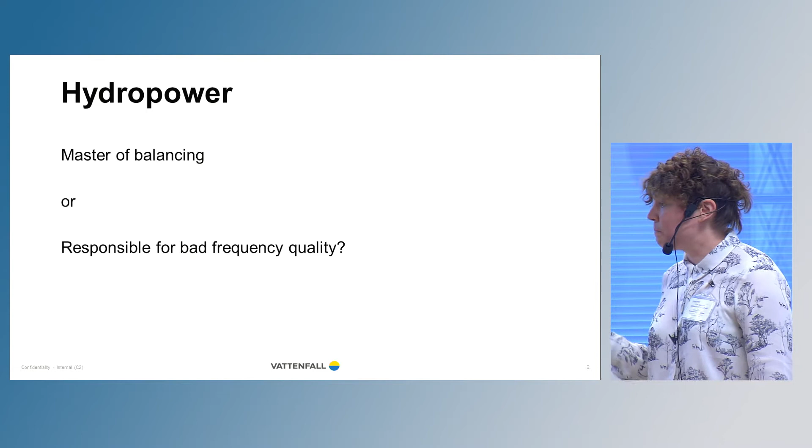Starting with master of balancing. One reason why hydropower is so good is because start and stop is very quick for hydropower, while thermal power takes a long time to heat up. It can take many hours to start. For hydropower, it's usually a matter of minutes. So going from full stop to full load is quick.

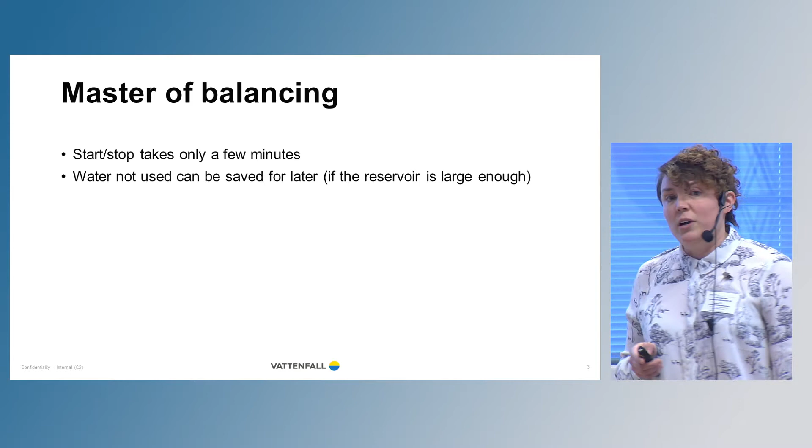Also, when we regulate hydropower, in most cases, we have reservoirs in the river, so we can save the water that we are not using. It's not like wind power, for example - if you regulate down, the wind is just spilled, you can't use it. But for hydropower, if you have a reservoir, you can save it. And in Sweden, most of the hydropower, at least large plants, have reservoirs.

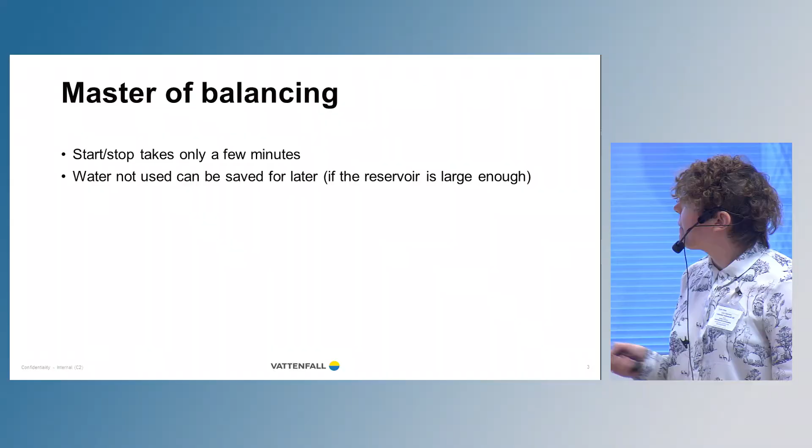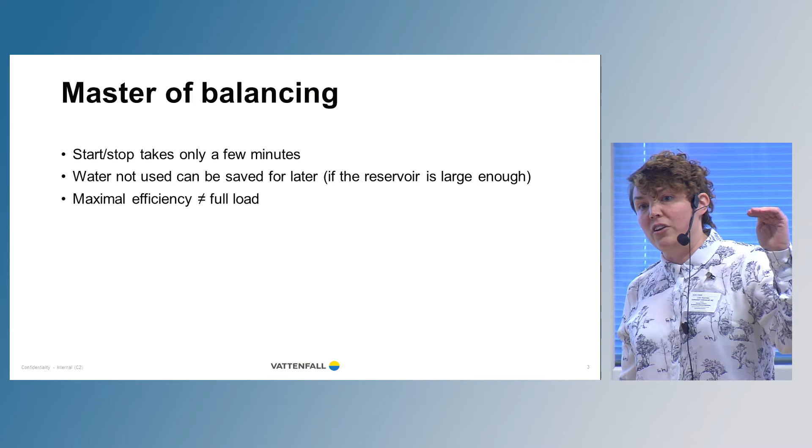Another factor is that normally maximal efficiency is not the same as full load for hydropower. So if you want to run your unit on maximal efficiency, you still have a margin for up regulation and down regulation.

Regulation speed is quite fast too - normally, at least in our stations, we have 1% per second for ramping of power, which is quite fast.

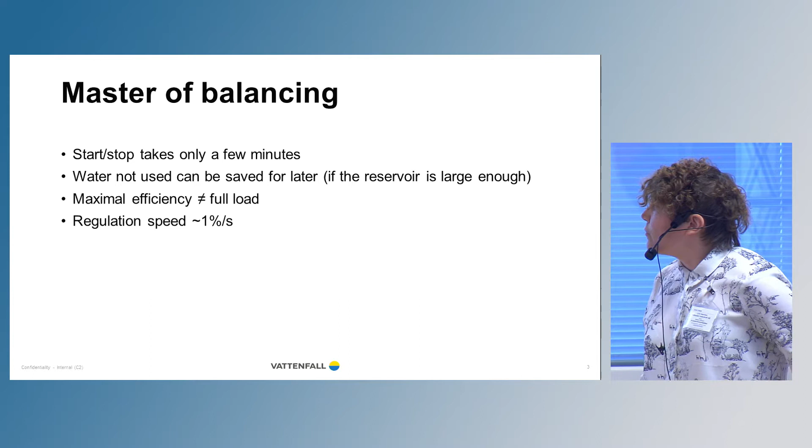So what is the downside? Why is it not good at regulating then? Well...

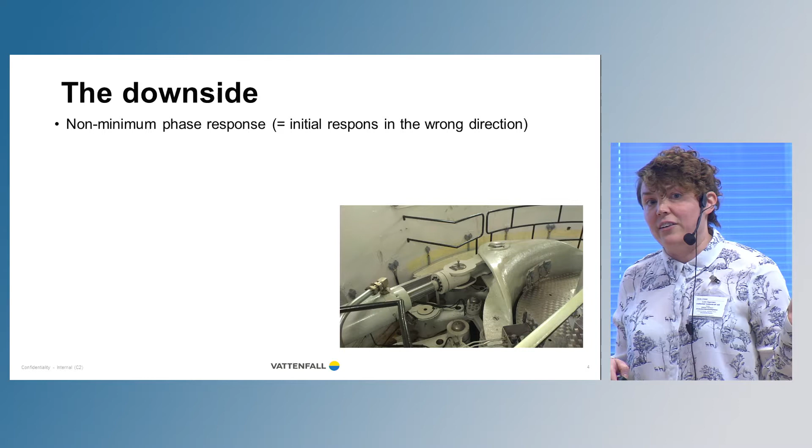Evert and Andreas, I think, have already talked about this effect: non-minimum phase response. What is that? It means that if you try to increase power, you will first get the response in the opposite direction. So if you want to increase, you get a decrease, and then an increase, and the other way around - if you want to decrease, you get first an increase. It's because you have to accelerate the water in the waterways before you can actually get the power out. So the initial power that you try to get out is spent by accelerating or decelerating water.

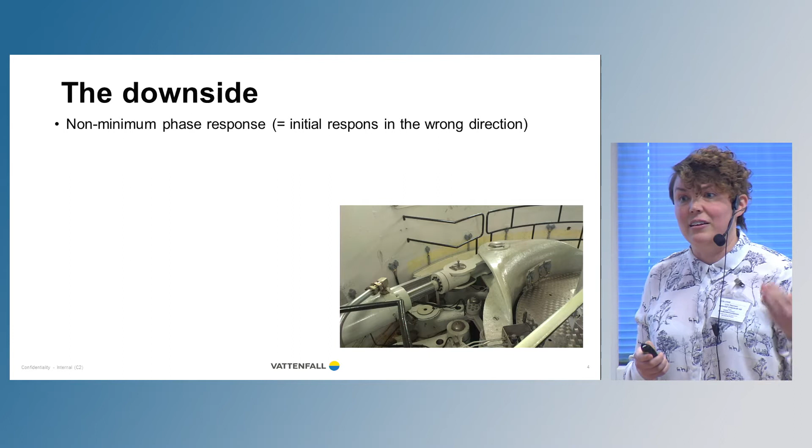So that's one part. Then another part that Evert talked a little bit about - or maybe he didn't talk exactly about it - is that output power from a hydropower unit depends on the head. And the head is something we can't control. It depends on how other units in the river have been run or operated before, and also how you have operated your own unit in the past. So that's the head - the head is the difference in water level above and below the hydropower unit.

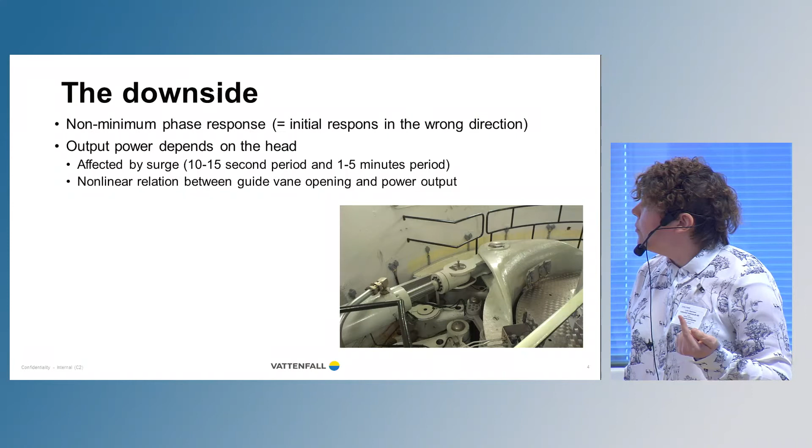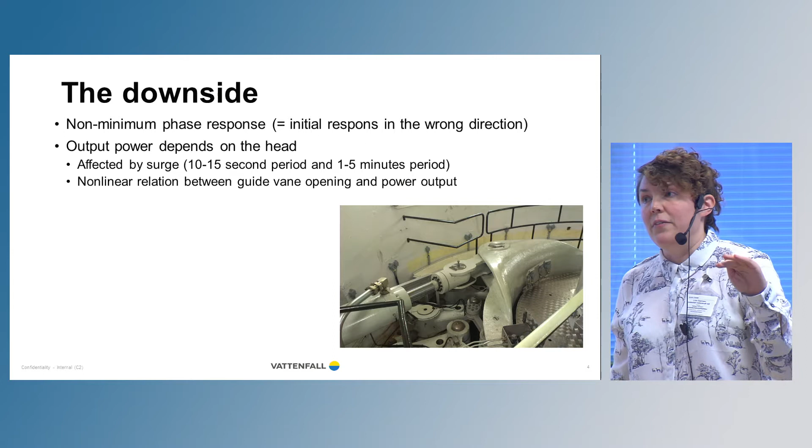So the head varies over time, and then also when you do a change in your own unit, you get variations in the head - that is surge in the waterways. Normally we have two different periods of this surge. One quicker, that is a 10 to 15 second period, which is surge between the surge gallery and the gate shaft of the unit, and then we have a longer period, which is surge between the surge gallery and the downstream water level. So these surge head variations are also something that we can't control. They are triggered by any changes in the water flow through the turbine.

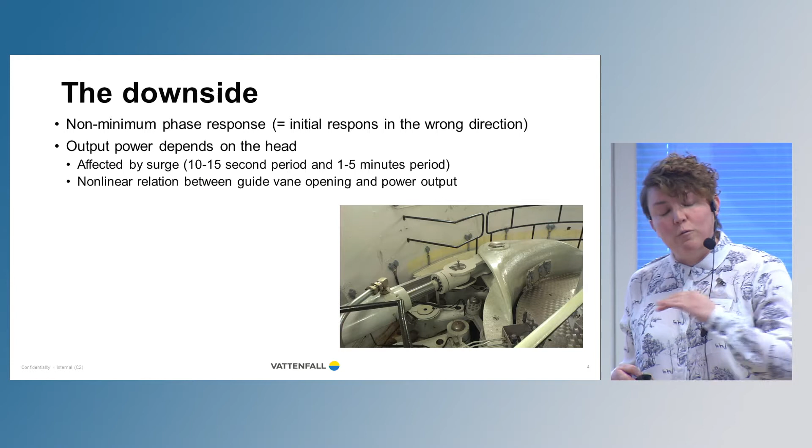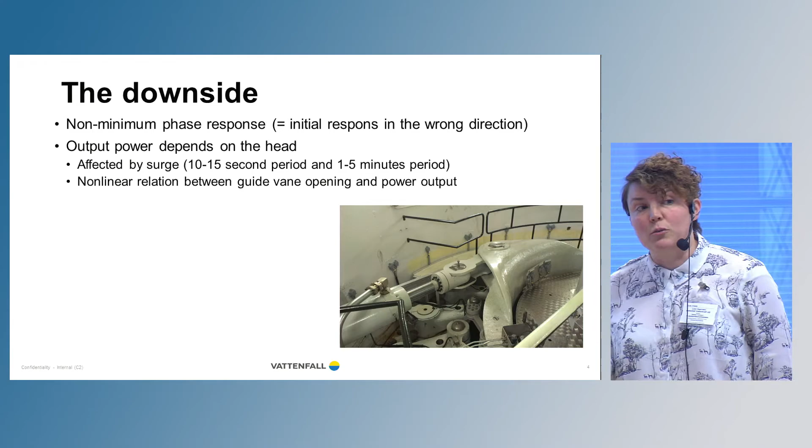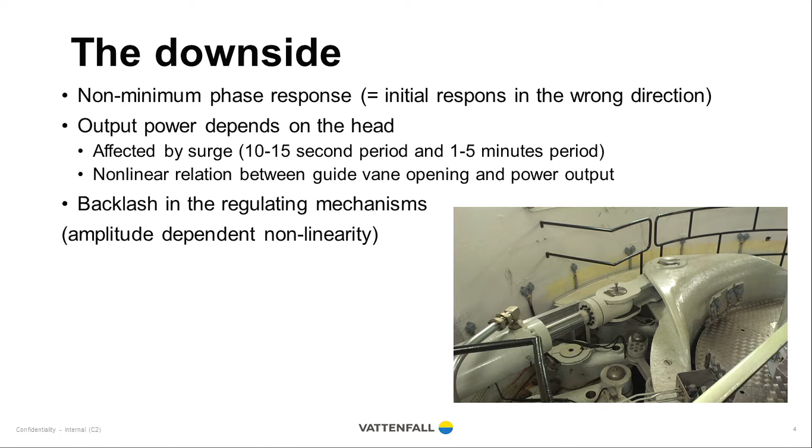So we have those, and then there's a nonlinear relation between guide vane opening and output power - that's what Evert talked about - changing the guide vane opening a certain percentage is not the same as changing the power a certain percentage. And then there's backlash in the regulating mechanism, which Evert also talked a little bit about. That phenomenon with backlash is amplitude dependent and nonlinear.

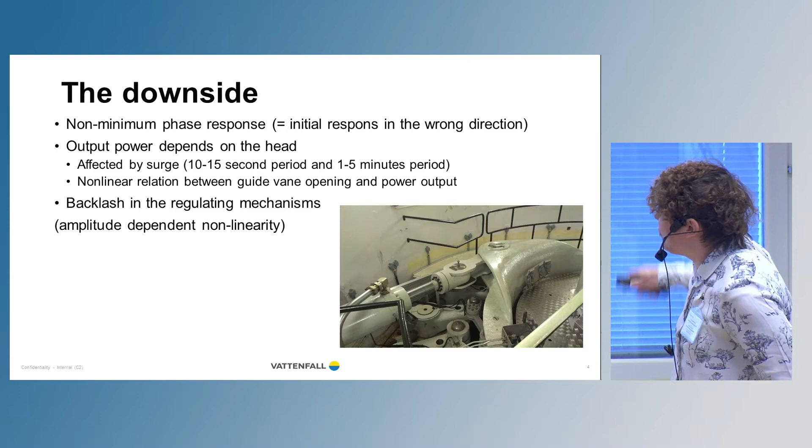So this picture, if you're not familiar with it, is part of the regulating mechanism for a Francis turbine. So we have here the guide vane - is it called guide vane ring? The guide vanes are down here, and one of the servos operates this ring and thereby opens or closes the guide vanes. So this mechanism has backlash in its operation.

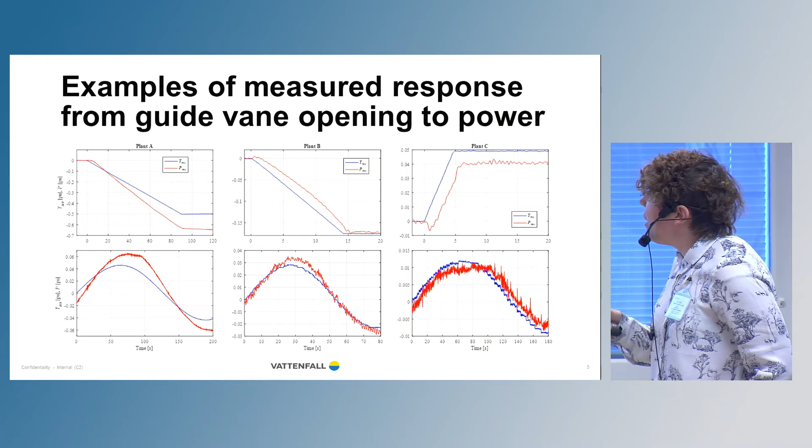The first one is this non-minimum phase response. So we get the response in the wrong direction. In my experience, this happens for Francis turbines, but not so much for Kaplan. So you see here, we don't really see any non-minimum response for this one. It's just more like a delay and not so much non-minimum phase.

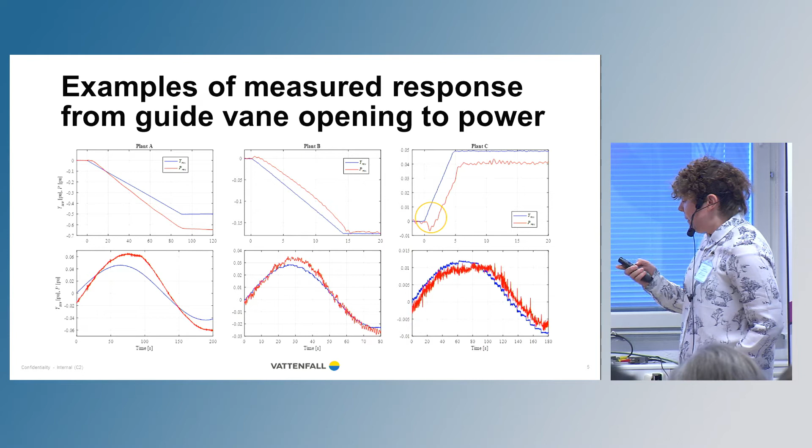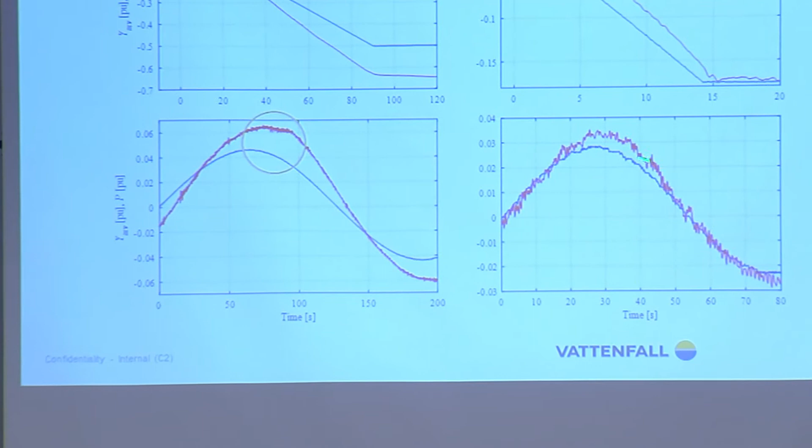And then we have this phenomenon, which is backlash. So, I didn't mention that the blue here is guide vane opening change, and the red is output power in all the graphs. So the guide vane opening follows a sine here, and this sine comes from a sinusoidal grid frequency test signal. And the power also follows this sine, but not really, because it's sort of disrupted by moving. When it changes direction, it is subject to the backlash, so nothing happens for a little while before it starts to regulate again. So you can see it here as a little bit of a plateau. This one does not have the same behavior, really. It's much more sinusoidal response, and this one has a large plateau here.

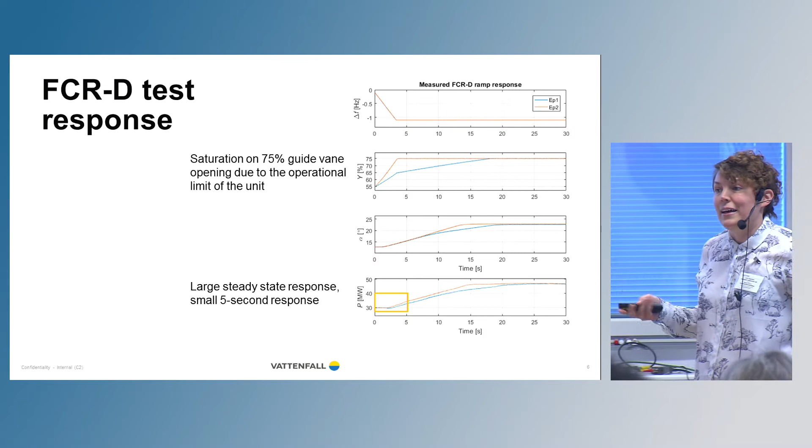So some other test results. We have made a few tests with the new technical requirement, the tests that are prescribed in the new technical requirements for FCR-N and FCR-D. And this is one of these FCR-D tests that we will, at least in the previous version of the requirements, were supposed to do.

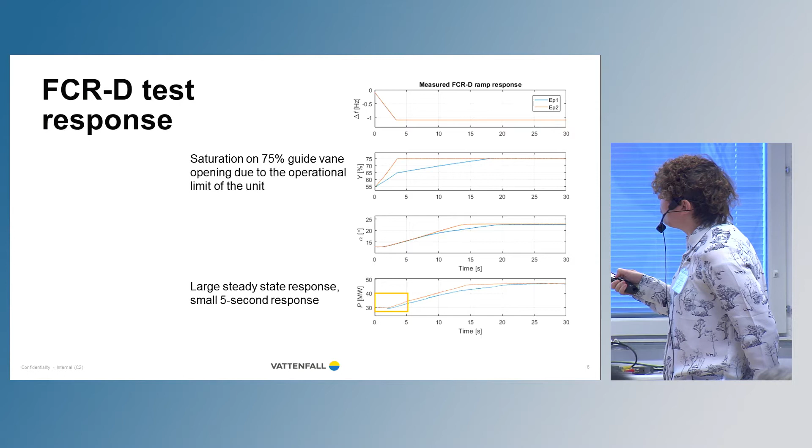So the test is basically start at 49.9 hertz. That is when the FCR-N is totally outregulated, and then take a frequency ramp down. It's actually a little bit too much, it should only be 1 hertz, so down to 49. But this is a little bit too much. 300 millihertz per second ramp, and then...

Measure the response. So here is guide vane opening response, runner angle opening, runner angle response, and power output. So this is a Kaplan unit where you can regulate both guide vanes and runner blade angle. And then EP1 and EP2 is just two different settings for how much gain this unit has, in how much controller gain, so delivering different amounts of regulation, so to say.

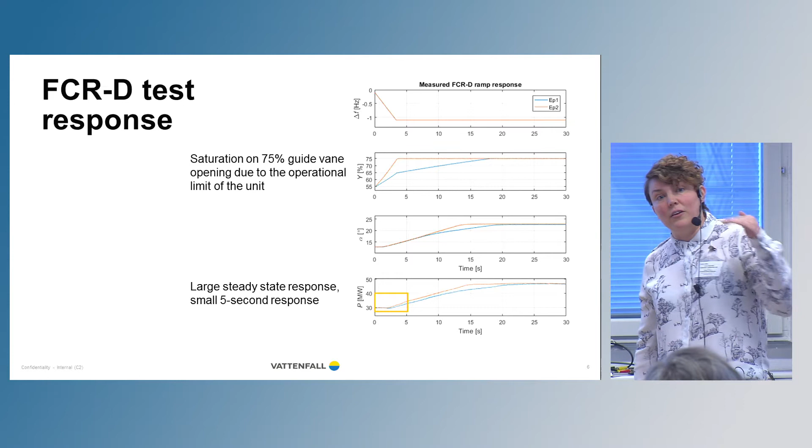So here we say, okay, guide vane opening, that one follows quite closely this ramp of the frequency. It's responding fast, actually. But we see also that it saturates at some point. In this case, it saturates at 75% because that's a limitation for this unit. And then even though this red one should have had a double steady state response, it also saturates at the same point. So you don't get all of that in practice.

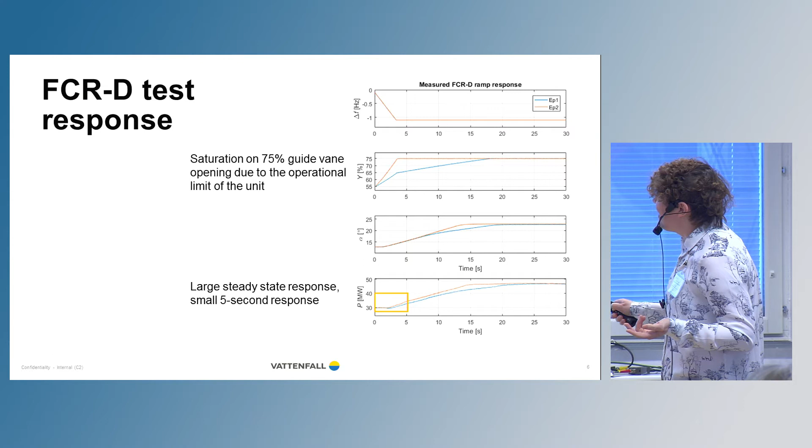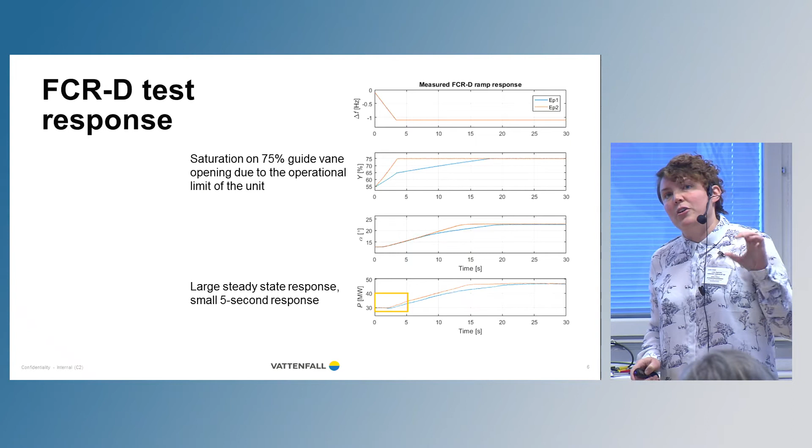And then the runner angle is much slower, and that is what controls actually most of the power output. So you see power output follows more this ramp of the runner angle than the guide vane opening. And it's much slower than this ramp that we had in frequency. And what's more important for FCR-D is that the requirement, or the amount that will count in the new requirement, is what you can deliver in 5 seconds. That's the important number, like how many megawatts in 5 seconds. And as you can see, in 5 seconds, there is very little from this unit.

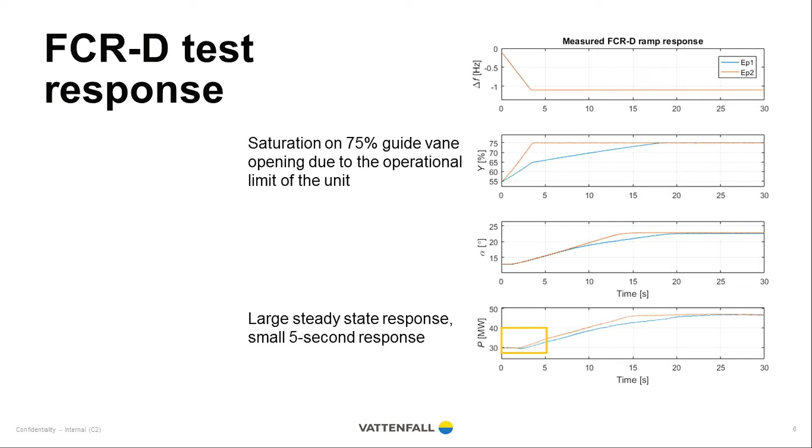And then we have regulated from 55% to 75% very quickly, but still the power output is not much in 5 seconds. And the steady state level is much higher than what we get out. So this is a problem when it comes to hydropower delivering FCR-D.

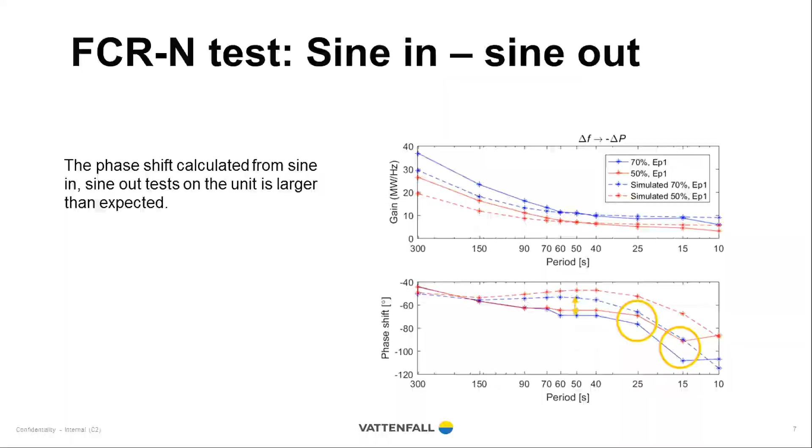And the problem with this phase shift is mostly at these points. When we get to short period times or high frequency, this phase shift will make the system unstable. If we pretend that this unit delivers all the frequency control, if it's scaled up and delivers all the frequency control to the system, this large phase shift at these period times would make the Nordic grid unstable, or at least not within the stability margins that are prescribed. So we would be maybe not unstable, but we wouldn't have the margins that we need according to the requirements.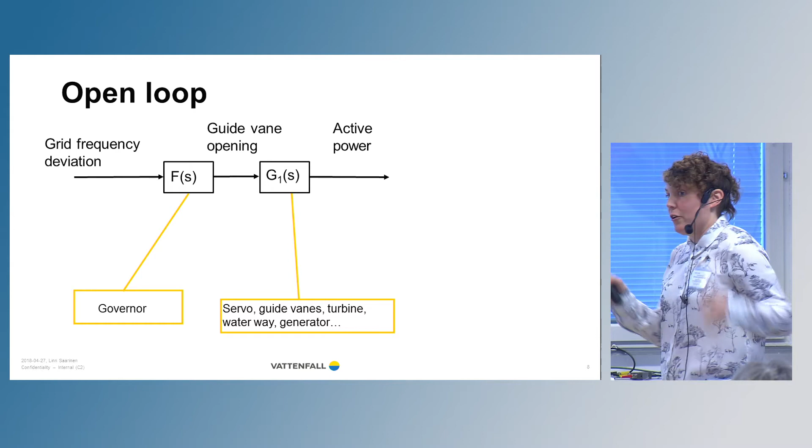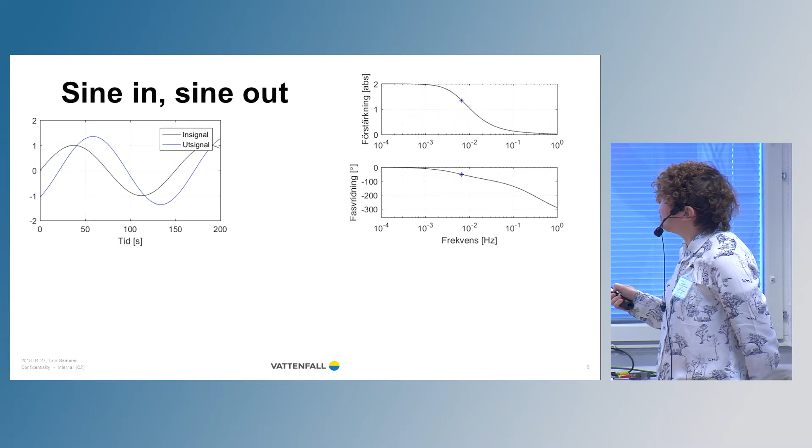So this is an open loop system, only our unit. With an open loop system, you typically get this kind of Bode plot. This shows input signal and output signal. The input signal is a sine, and the output signal is also a sine, but with a certain gain here, which is larger than 1 in this case, because the output is larger than the input.

And the phase shift, how many degrees it is delayed, we plot as a point in this phase shift diagram. So if we increase the frequency, or decrease the period of the signal, we typically get less gain and more negative phase shift. This is typical for low-pass systems, which many systems in our reality have. And if we increase the frequency even more, we get even less gain and also more negative phase shift.

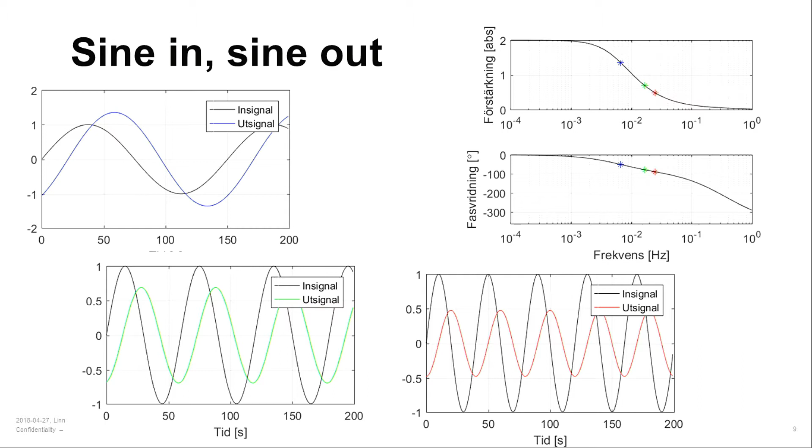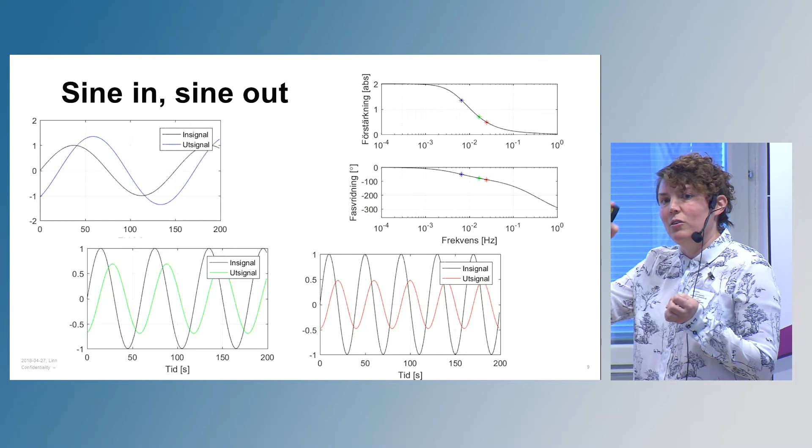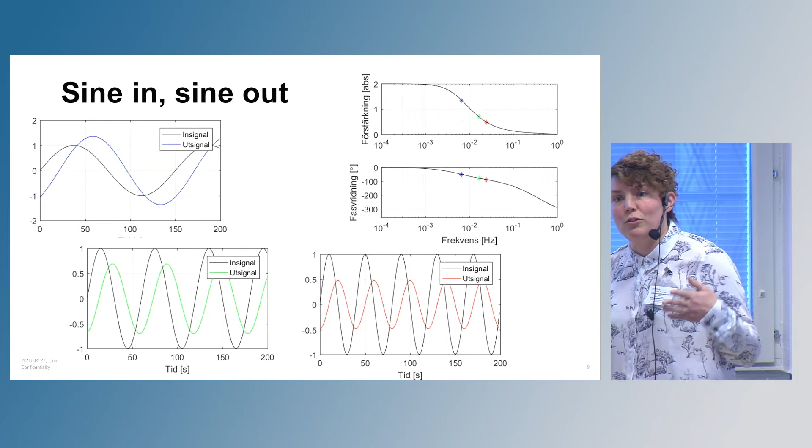The critical point of this system is if you get so much negative phase shift that you come a whole half period too late with your response, then you will start to increase instead of decrease the disturbance, and you will have an oscillation in the system that just increases in size, and then it will break down. If the system has 180 degrees phase shift and gain larger than 1 for the whole system, then you have increasing amplitude and an unstable system. So that's what we have to watch out for.

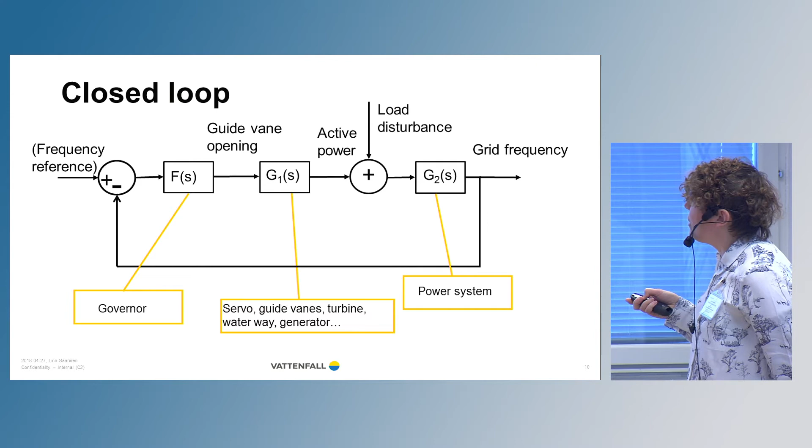So looking at the closed loop system then, we have the same system we had before with frequency to active power, but we close the loop with the power system and feed back this frequency. What happens to this Bode diagram that we measured on the open loop system?

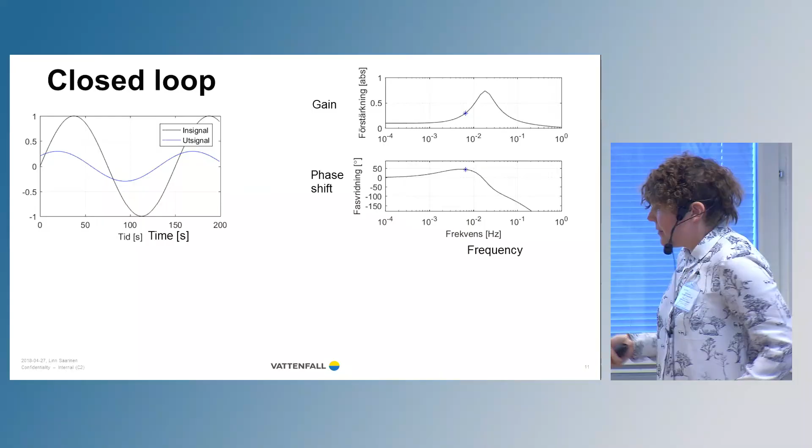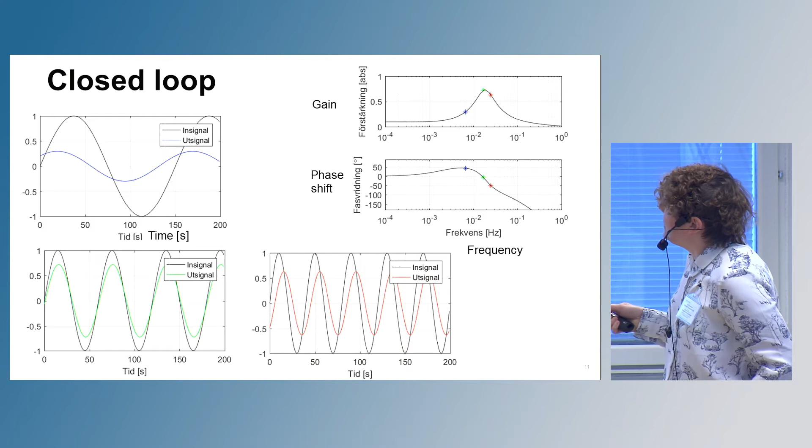Then we get this type of response instead, the same sinusoids. This point that was in the open loop system was up here somewhere. It comes down, the gain will be less, and the phase curve will look like this. In the closed loop system, what we don't want is to have a large peak here. This peak corresponds to coming closer to this instability point where any disturbance is increased instead of decreased.

So the peak here is the problem, and if we have bad controller tuning, then we will get a larger peak here. So any disturbance with this frequency that we have in this peak, if the load or another power source varies with this frequency, then that will have a large impact on the total system grid frequency. It will be very visible, or even increased.

So this was a little quick crash course in Bode diagram, just to make sure that you follow how these technical requirements work. So where are we now then in the system? Are we close to this problematic point in reality or not? It's a good question.

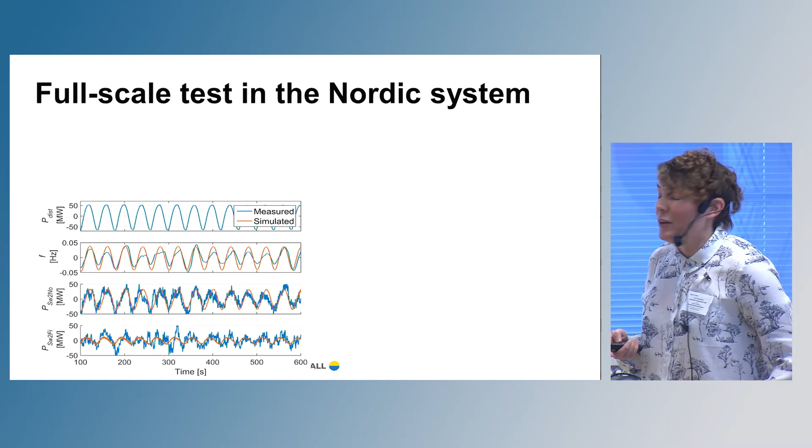In 2014, we did a full-scale test in the Nordic system to see if we can actually see this behavior, that a small disturbance can get a large frequency deviation if it has the right period. So here is the power disturbance, plus minus 50 megawatt, created at the hydropower unit. And here is the frequency response to this disturbance, and the power flow between Sweden and Norway and between Sweden and Finland.

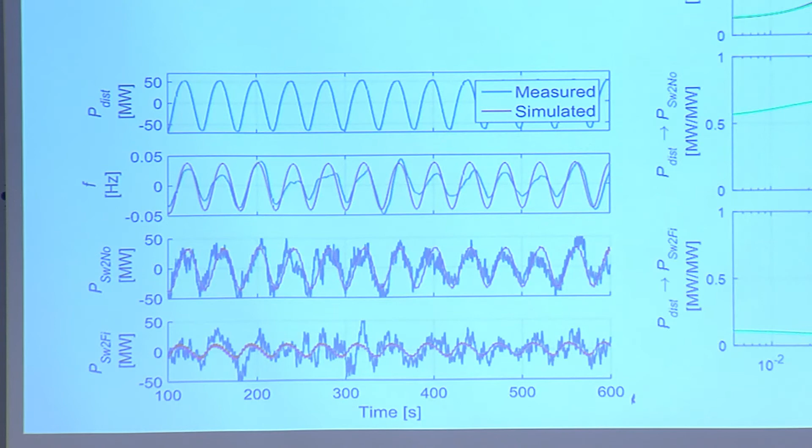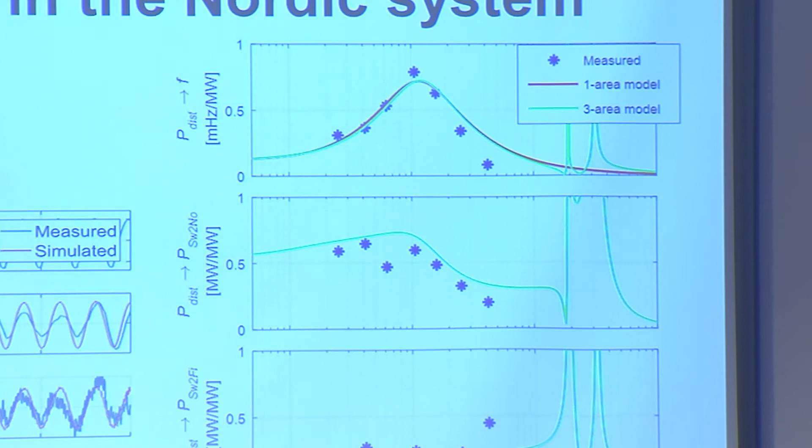And the corresponding Bode plot for these measurements: the model has this peak, as we saw before, and the measurements, where we put a power disturbance with varying frequencies or period times into the system and measured the response, also has this peak. So it's clear that the concept of this model is correct. This is how we can actually measure it in reality.

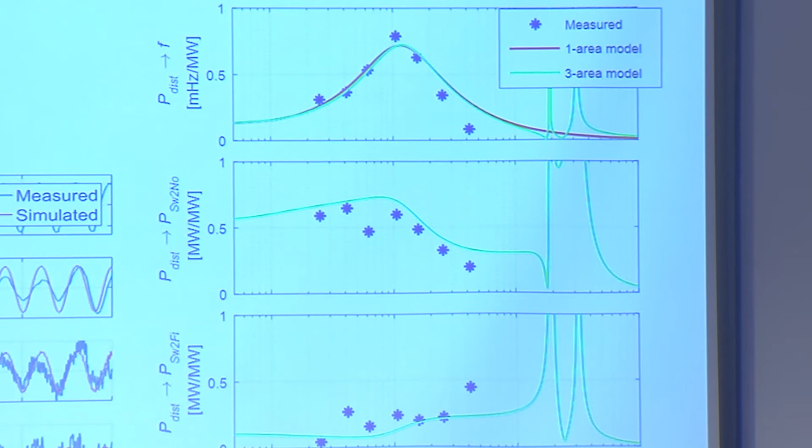And it's not a lot of power that is needed. Plus minus 50 megawatt is quite enough to have an impact on the grid frequency if the period is 60 seconds.

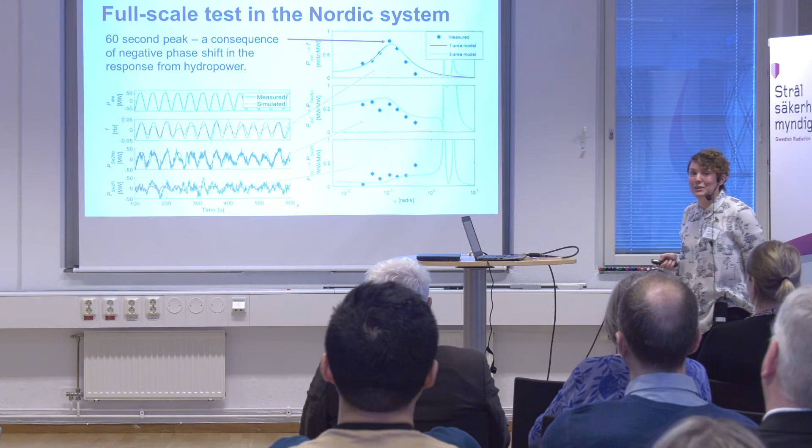So we can say that it's hydropower that is the culprit for creating this peak, because of the negative phase shift that we have from hydropower.

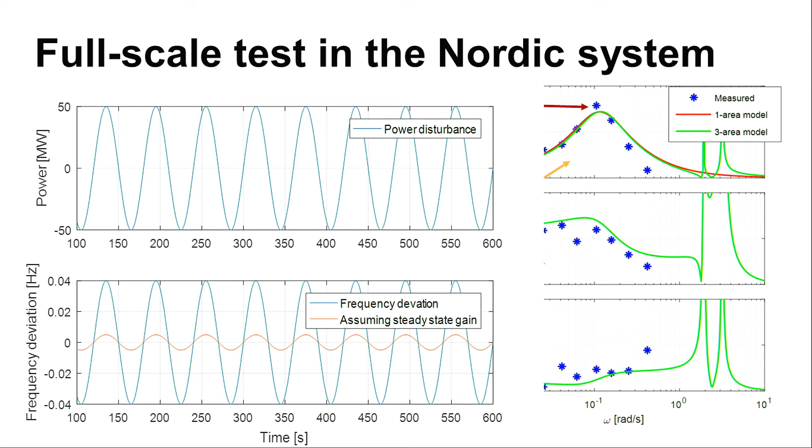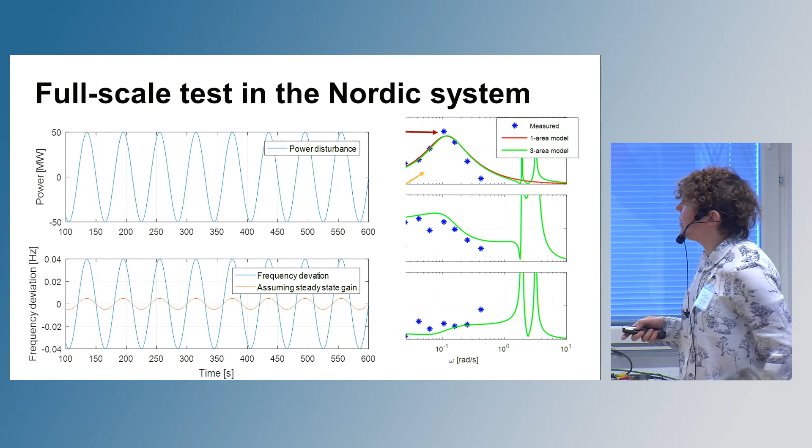Another thing to keep in mind is that when we have these relatively fast, not very fast, but 1 minute period time disturbances like this, the power regulation from hydropower units and other units that have this setting in the governor with a 60-second feedback constant, the actual power output... let's see.

What's wrong with my figure? It shouldn't say frequency deviation here. Oh yeah, okay, frequency deviation.

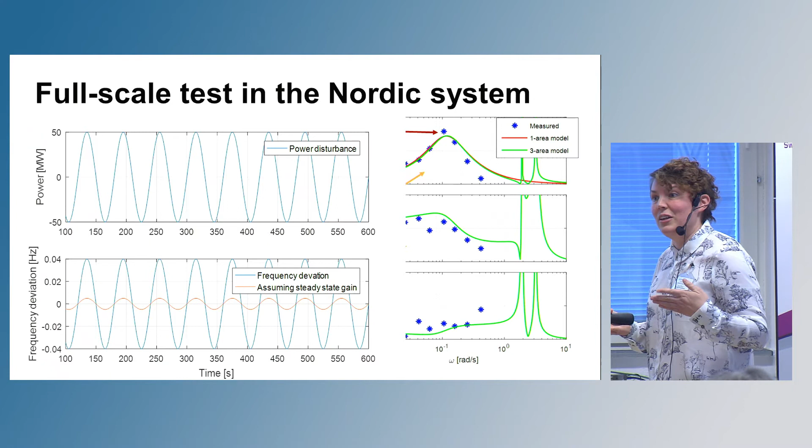If we assume we have this power disturbance, and if we got the response from the steady state gain, like how much regulating power we have, like 600 megawatts FCR-N, if we should get the full response for this disturbance, it would be this blue curve, which is quite a lot. But in reality, we only get this little.

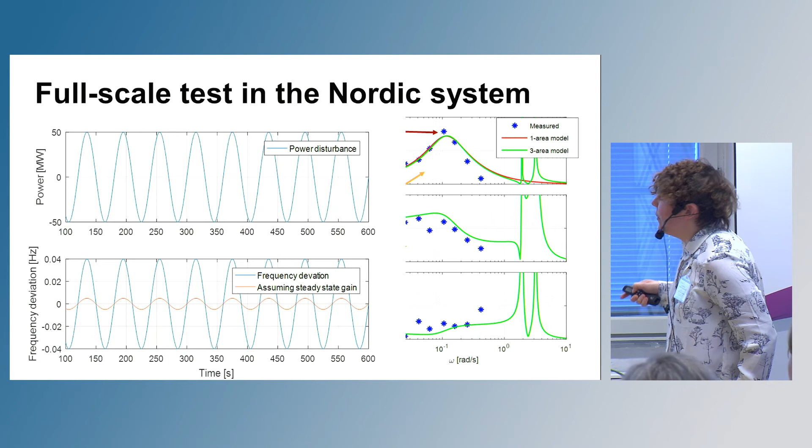My titles are not good here, I realize. I don't know how I thought when I wrote that. That's because 60 seconds is too short a time for the governor and the unit to actually get power out. It's only a little fraction of it that actually gets regulated. So the active regulating strength is much lower when we have these periodic disturbances in the power.

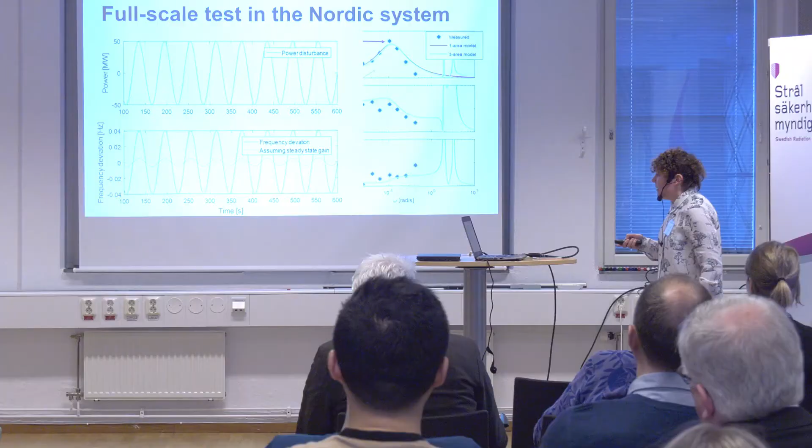I think that's easy to forget, because maybe we tend to think that this control, the frequency control, has a time constant of 60 seconds. Then it should mean that it actually regulates, that it should be active when the disturbance is 60 seconds, because it's the same number. We should get some regulation, but actually that just means it starts to act when the disturbance is 60 seconds, but it's still very little.

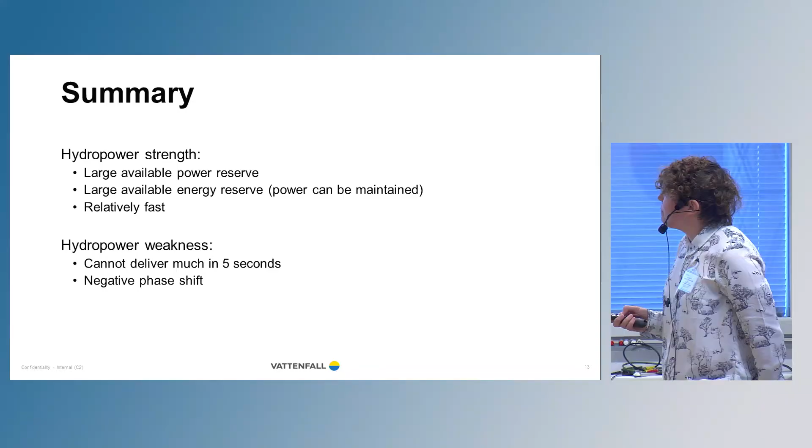So you need to have a much shorter time constant to actually regulate a lot for the 60 seconds. Okay, I have arrived at the summary.

Hydropower's strength when it comes to regulation is large available power reserve—we can regulate a lot with hydropower. We also have a large available energy reserve, so we can maintain the power output, and it's relatively fast. But the weakness is that we can't deliver much in 5 seconds.

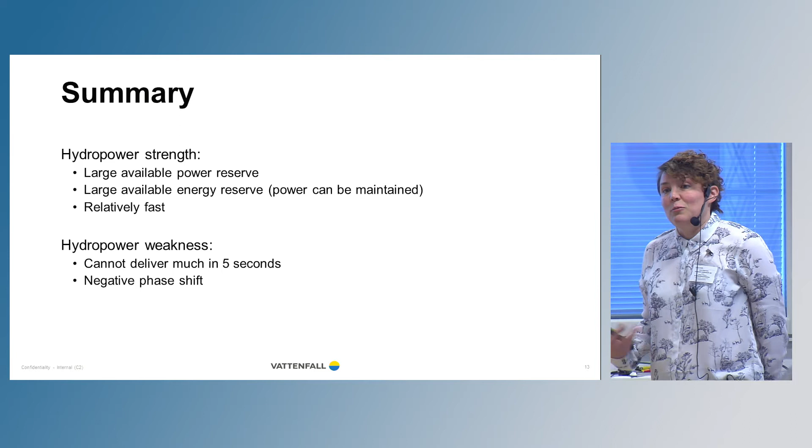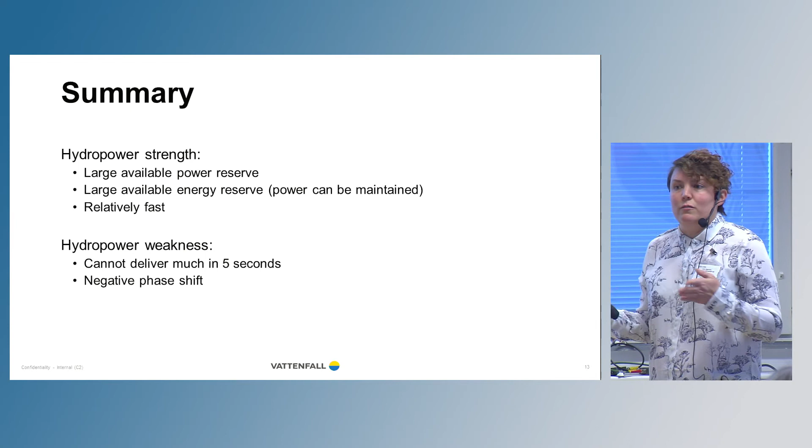And we have this negative phase shift that makes regulation on the time scale of 1 minute and faster not good, even up to maybe a few minutes. The regulation is not so good.

So what is needed then to complement hydropower? It can do a good work, but something else might be needed. As I see it, a small, fast, continuous response that can take on all these small variations that hydropower can't follow and balance them.

And then, on the other hand, a fast and large response to large disturbances, because that's also something hydropower can't do—to react really quickly when there's a big disturbance. But then again,

these complementing responses don't really have to be persistent to be useful. Since hydropower can come in after a little while with a lot of power, actually what's missing is something that can take on these disturbances for a shorter time and not necessarily keep up in the long run.

That's about it. I just added one more slide about the new regulations. Apart from what Andreas talked about with new technical requirements, we also have this new regulatory landscape with the RFG and EIFS, Energimarknadsinspektionens föreskrift. I wanted to mention this because I see it as very problematic.